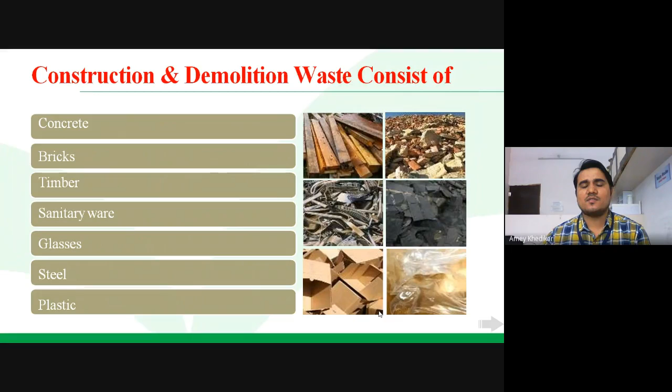The present Indian scenario of construction and demolition waste is 14.5 metric tons out of 48 metric tons of total solid waste generated per annum. We have divided the statistical data into metro cities, a few major cities in India; the highest waste is generated from Delhi, 5,875 metric tons per day. Then Greater Mumbai, followed by Chennai, Hyderabad, Bangalore, Ahmedabad, Kanpur, Jaipur, Agra, and Indore.

This database is as per the 2012 records, and I have got it from a few internet sources. This is the statistical data where we can see the generation of waste from the top 10 cities in India.

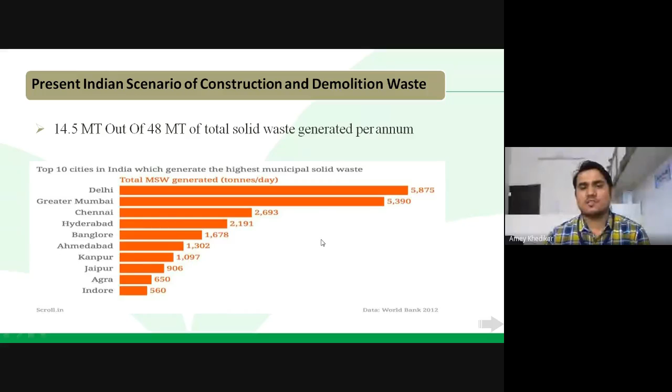Out of the entire waste, 65% is coming from concrete only. Then bricks and tiles 25%, wood 5%, metal 2%, others 1%, and plastic 1 to 2%. This pie diagram shows us the amount of waste in the form of materials.

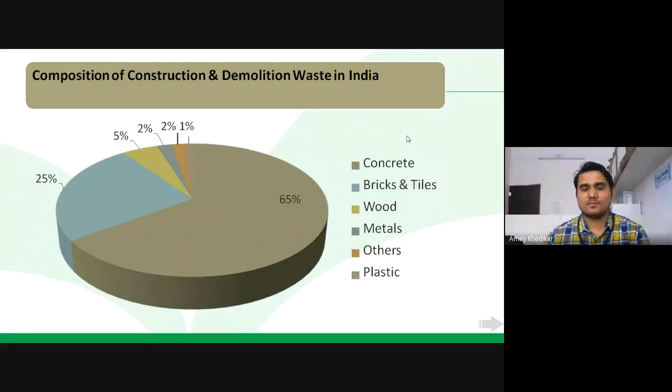Now we'll see the reasons for the increase of construction and demolition waste. Many old buildings, concrete pavements, bridges, and other structures have exceeded their age and limit of use due to structural deterioration beyond repair and need to be demolished. After the average age of the structure, there is deterioration in the structural members, so beyond repair it needs to be demolished.

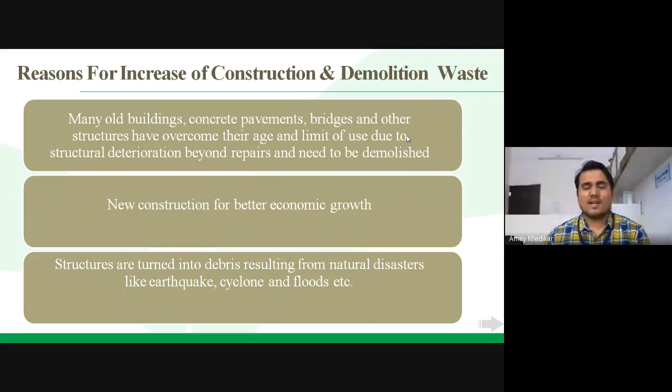New construction for better economic growth. Structures are turned into debris from natural disasters like earthquakes, cyclones, floods, etc. These may be the reasons for increasing construction and demolition waste.

Now we'll see the hierarchy of C&D management: first reduce, then reuse, then recycle, then recovery, and then landfill. In reduce, we lower the amount of waste produced. First we have to reduce the use. Then we go for reuse, using the material repeatedly. Then using the materials to make new products, that is recycling, the best solution nowadays.

I can quote one example: in the construction of the Nagpur Metro, the Chhatrapati Bridge was demolished, and the same material was reused in the construction of the flyover.

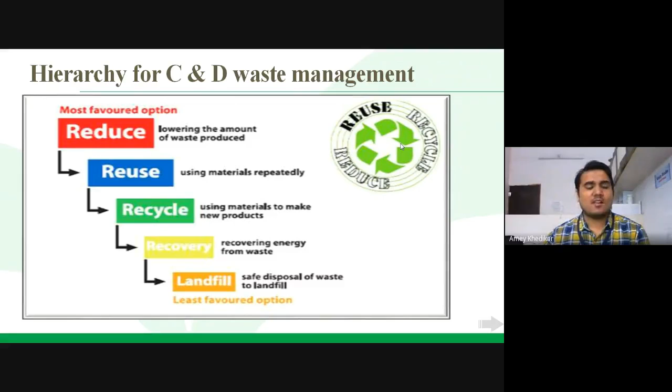That's a good thing. Then the recovery, energy from the waste, and finally the landfills. That is the least favoured option, landfilling.

So we need to sort the process of construction and demolition waste. There are two processes: chemical mineralogical appraisal, and mechanical sorting.

In the chemical mineralogical appraisal, we recognize particular grain size using X-ray fluorescence, to investigate chemical composition in terms of major elements, and X-ray diffractometry to recognize the constitute mineralogical phases. The mechanical sorting process includes bar screening, magnetic separation, and air classifier.

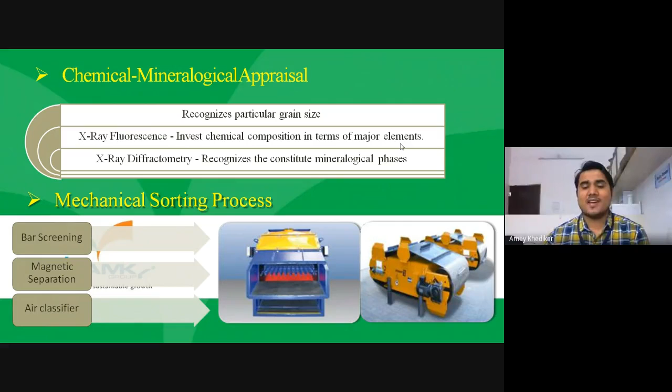Now, the main issues for construction demolition waste management: absence of segregation of waste at source, meaning on site we have to segregate the waste, but due to the absence, it may cause problems. And lack of appropriately located recycling facilities. Then indifferent attitude of citizens towards waste management, that is a major problem. And illegal practices followed by contractors to save money.

So these are the main issues of construction and demolition waste management: absence of segregation at the site, and lack of appropriately located recycling facilities on the builder or contractor side. Then indifferent attitude of citizens towards waste management, that is also a fact. And illegal practices performed by contractors to save money, that is also a fact.

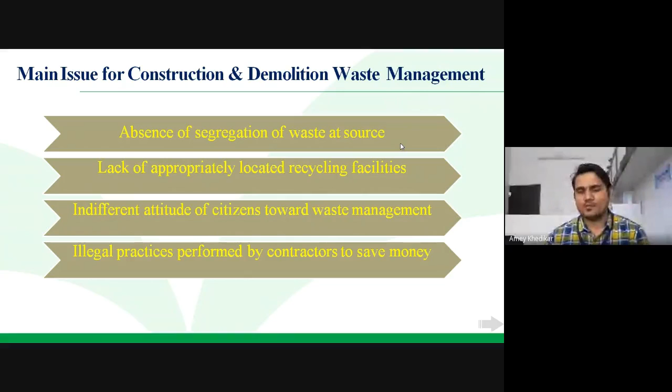Now, key requirements of a waste management plan. What are the points, what is the plan needed in order to have proper waste management? First of all, types, quantities, and quality of waste need to be measured for reducing waste generation.

Then on-site waste sorting, on-site and off-site reuse, areas for waste storage, quantities of waste requiring off-site disposal, and monitoring and auditing programs regularly and periodically, so that we can manage the entire waste.

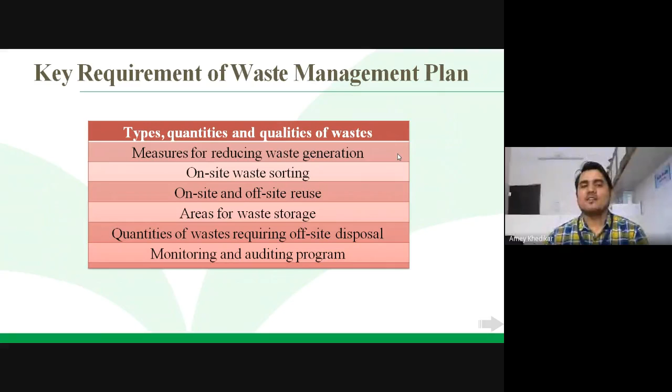Now, C&D waste generation in India is a gross underestimation. As far as the Union Ministry of Forest and Environment has confessed, there is no systematic database on C&D waste. As per estimates of the Center for Science and Environment, CSE, since 2005, India has newly constructed 5.75 billion square meters of additional floor space, with almost 1 billion square meters in 2013 itself.

According to the Technology Information Forecasting and Assessment Council, new construction generates 40 to 60 kg of C&D waste per square meter. Taking an average of 50 kg per square meter, India must have generated 50 million tons of C&D waste in 2013.

Over the last 8 years, it would have produced 287 metric tons of this waste. Now imagine the quantum of waste that we have produced in the last 7 to 8 years after 2013.

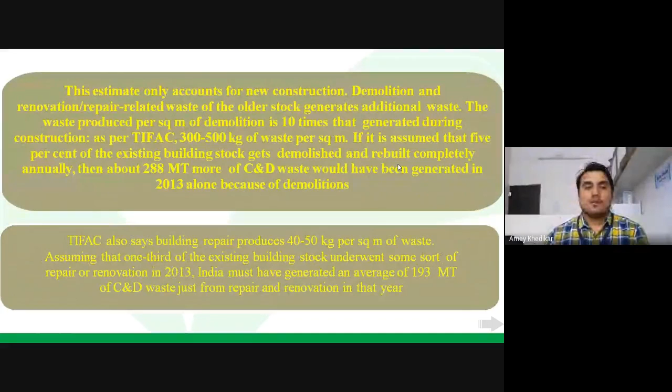This estimate only accounts for new construction; demolition and renovation repairs related waste of the existing stock generates additional waste. The waste produced per square meter of demolition is 10 times that generated during construction. It's a very serious issue that the waste coming out is 10 times more, not 10%, 10 times more than during construction.

As per TIFAC, 300 to 500 kg of waste per square meter is produced from demolition. If it is assumed that 5% of the existing building stock gets demolished and rebuilt completely annually, then about 288 metric tons more of C&D waste would have been generated in 2013 alone because of demolitions.

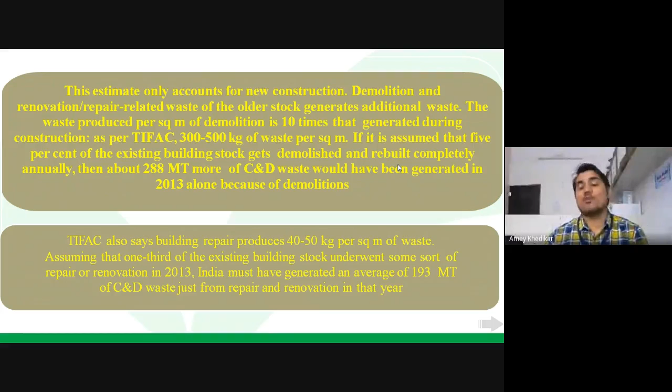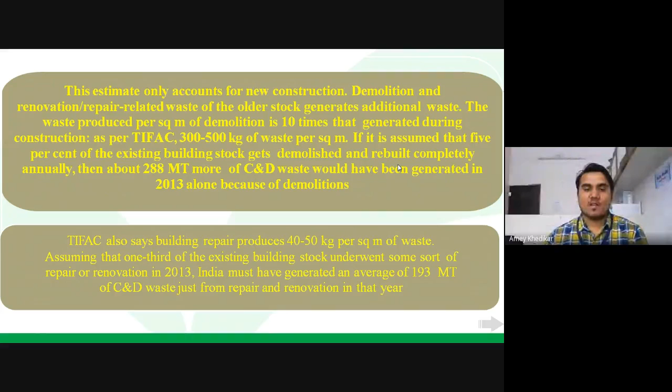Also, TIFAC says building repair produces 40 to 50 kg per square meter of waste. Assuming that one third of the existing building stock underwent some sort of repair or renovation in 2013, India must have generated an average of 193 metric tons of C&D waste just from repair and renovation that year.

Thus, the total C&D waste generated in India just by buildings in one year, 2013, amounts to a humungous 530 metric tons, 44 times higher than the official estimate.

Imagine the scenario if the waste generated from infrastructure projects such as roads and dams is added. Not surprisingly, in India, if C&D waste is quantified, it will be more than all the other types of solid waste put together. Now, the question is, where is all this C&D waste going?

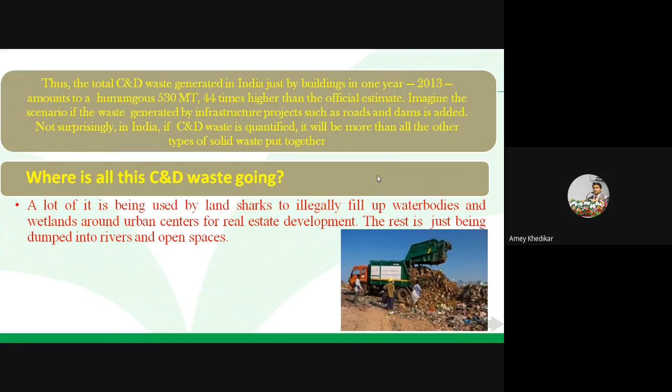A lot of it is being used by land sharks to illegally fill up water bodies and wetlands around urban centers for real estate development. The rest is just being dumped into rivers and open spaces. Basically, it's an alarming situation as far as environmental issues are concerned, since very few things are reused, but most of it is dumped into rivers and open spaces, which is a very harmful case.

There is basically no reuse in India. Construction agencies like CPWD say that Indian laws permit the use of only naturally sourced building material. The IS 383-1970 Indian standard specification related to aggregates for concrete, laid down by the Bureau of Indian Standards (BIS), stipulates that concrete can be made only with naturally sourced materials. Construction agencies cite this rule to avoid using recycled C&D waste.

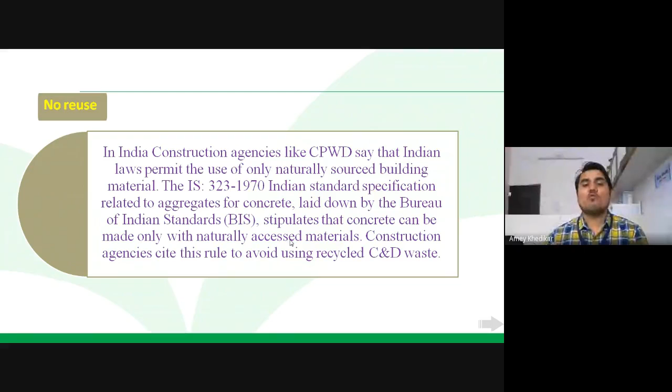Now, building material crisis and environmental concern. I am talking regarding the environmental concern that much waste is dumped only in open spaces and rivers. Indiscriminate mining of sand and other minor minerals has caused extensive damage to the environment, scarred rivers, made many areas susceptible to floods, and destroyed crucial recharge zones.

In 2012, the Supreme Court asked state governments to amend rules to regulate mining of minor minerals and ensure environmental management. On August 5, 2013, the National Green Tribunal declared sand mining without environmental clearance illegal. However, the concern for a deteriorating environment is being seen in the context of growing shortage of this material.

The Union Ministry of Housing and Urban Poverty Alleviation had told Rajya Sabha in 2012 about the shortage of building material, especially for aggregates and concrete. Due to mining bans and restrictions on environmental grounds, the shortage has been so severe that several civil projects in India are facing delays. This is aggravating the housing crisis and affects the construction of roads, bridges, canals, etc.

If sand mining and other natural source materials have to be restricted and regulated, other strategies must be put in place to reduce the demand. Basically, the problem is all about the shortage of building material. So reuse can be the solution, recycle can be the solution. In that context, the government is also asking for explanations from state governments regarding the environmental issues and building material cases.

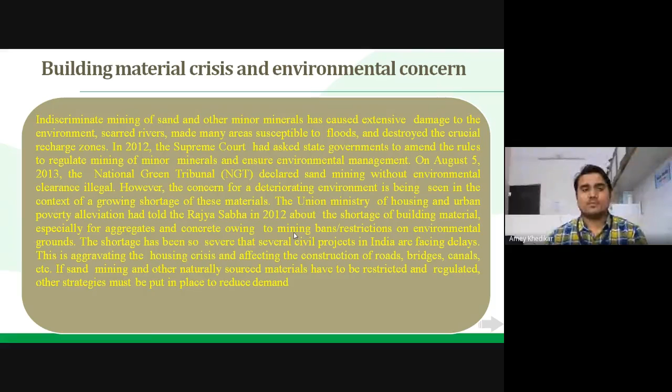...developed a pilot project to demonstrate the potential benefits of increasing recycle rates for C&D waste in Delhi. The project itself has been set up on a public-private partnership basis, which has proved successful as it serves the dual purpose of saving landfill space on one hand and developing the market for C&D recycling on the other. These pavement blocks were made as part of this pilot project, and it is the best example of recycled waste.

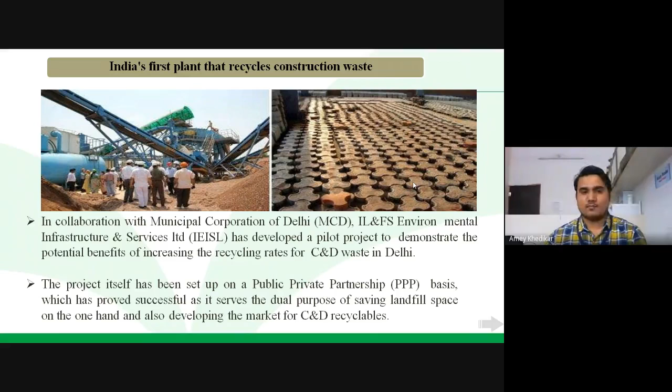Global practices show the way regarding recycling. In the United Kingdom, the Northern Ireland Environment Agency has published the quality protocol for the production of aggregates from inert waste in 2004. This has helped promote use of recycled and secondary aggregates. Almost 280 metric tons of aggregates are used every year, which is 28% of total C&D waste generated.

Singapore, yet another land-constrained country, recycles 98% of its C&D waste. So we can take this as the best example. Singapore is setting the example regarding C&D waste, using 98% recycled material.

In the US, New York has stringent measures for C&D waste as it is landlocked and has limited space for disposal. Its disposal practices are more efficient than the rest of the US. It forces developers to segregate waste on site and dismantle rather than demolish, in addition to other measures. So among these countries, Singapore sets the best example, the US also sets an example, and the UK also sets an example regarding reuse and segregation of waste on site. It is very encouraging to see that Singapore, a land-constrained country, recycles 98% of C&D waste.

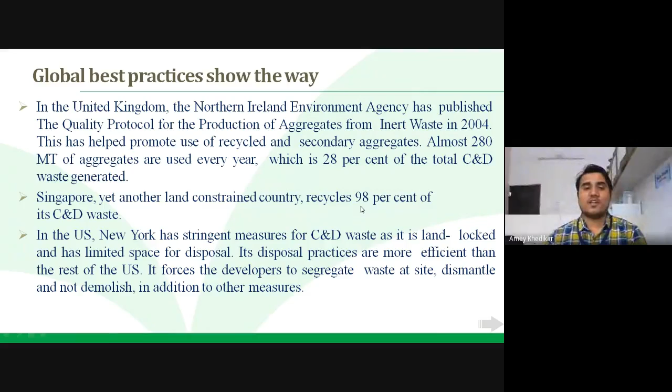Construction and demolition waste - what exactly does it mean? We have seen a lot of statistical data till now - countries, cities, the waste, types of waste, government rules, bylaws, and government thought process regarding this. Now we'll see actually the demolition waste. Basically, it's waste building material, dredging materials produced in the process of construction, remodeling, repair, or demolition of residential buildings, commercial buildings, other structures, and pavements.

More than 50% of waste generated worldwide falls in the C&D category. Many European countries achieve 90% plus recycling, while other developed countries are struggling to improve. Approximately 95% of the waste on a typical construction site can be recycled. C&D waste should not be disposed of in MSW landfills.

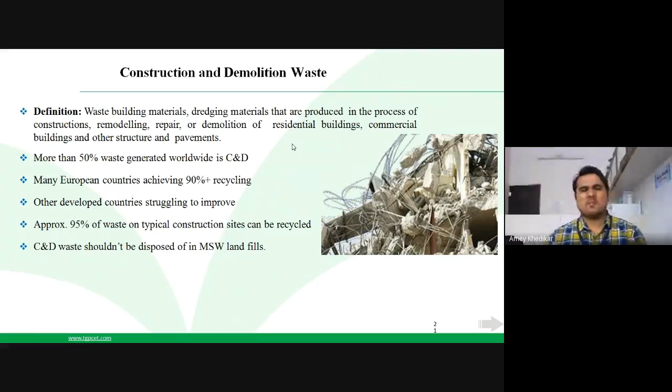So basically it is the waste which is coming out during the construction, remodeling or repairs, demolition of residential, any kind of building, maybe flyover, maybe buildings, maybe road, anything. That is the construction waste.

Now we'll see the contribution of construction industry in India's GDP. You can see here millions of dollars saved if the 3R techniques are applied. 40 to 60% investment is in materials, basically, of the entire industry, and this industry is 100 billion dollars. Out of the 100 billion industry, the 40 to 60% investment is in the materials. Now imagine if we start using the recycled one, then how much we can save.

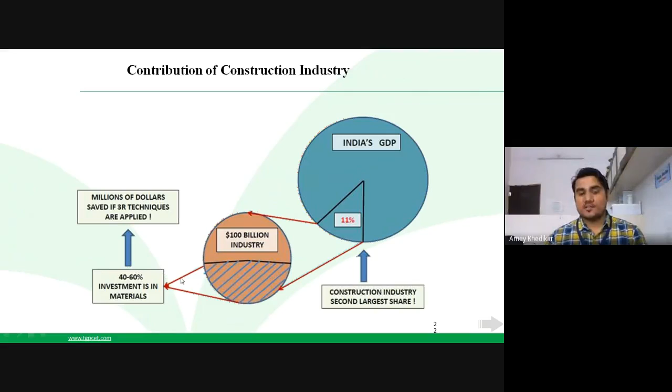Just imagine, in the entire India's GDP, the 11% contribution is coming from the 100 billion construction industry. And out of that, 40 to 60% is coming only from the materials. In the entire globe, the construction industry has the second largest share in the development of the nation, as far as GDP of India is concerned. So we can think here that if we start reusing the materials, then we can ultimately help grow our GDP much better.

Now, categorization of C&D waste: inert material and non-inert material. It has been categorized into two parts. First will be the inert material, and second will be the non-inert material. In the inert material: rocks, concrete, brick, stone, and earth. In the non-inert material: plastic, packaging waste, paints. These are the non-inert materials.

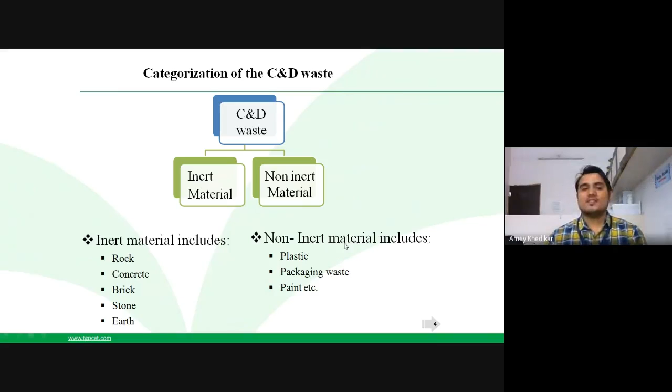Pay attention. I can see the question in the chat box asked by Neha, that construction waste is specified to only buildings. No, basically not. Basically, construction waste may come from any site. If you are constructing a hotel, residential building, commercial, even a tower, a bridge, a flyover, or rehabilitation or demolition, that can be considered as waste.

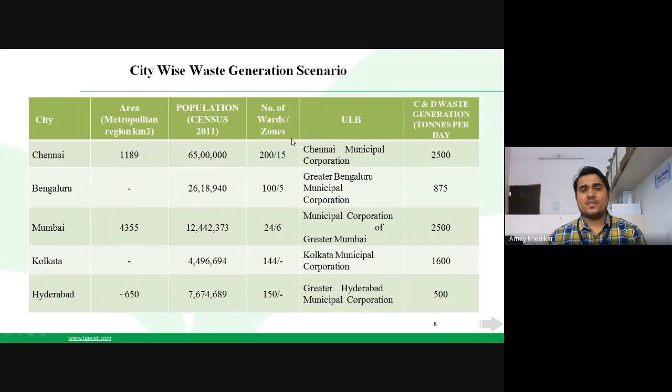So again, we will see in detail the city-wise waste generation scenario. City-wise: Chennai, then population, then wards, the ULB. You can see here Chennai, Bengaluru, Mumbai, Kolkata, Hyderabad. So 2,500 tons per day they are producing. Then Bengaluru 875, then Mumbai 2,500, Kolkata 1,600, Hyderabad 500. So you can see the population, and in respect to the population, see the number of wards and zones. So all these are the statistics.

So it should not be there. Some part the contractor side is faulty, some part negligence can be shown from the citizens, some part if in terms of blaming, you can blame even a few authorities of government also. It's a two-way communication from the society and from the industries. There has to be some mutual understanding, there has to be some strict bylaws in order to avoid such kind of fate.

Okay. Now, in the end, we will see sustainable practices. Plan a separate line of collection and transportation of C&D waste. Separate storage of C&D waste for different categories of generators: household, institution, and infrastructure. Absolutely, there has to be a separate category of generators. Separate things to be collected from household, a separate mechanism is to be there to collect from institutional buildings and from infrastructure. Processing for better utilization, even fine materials can be used as inert daily cover at sanitary landfills.

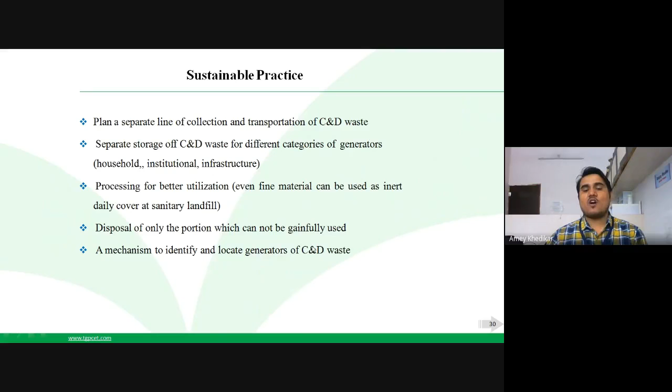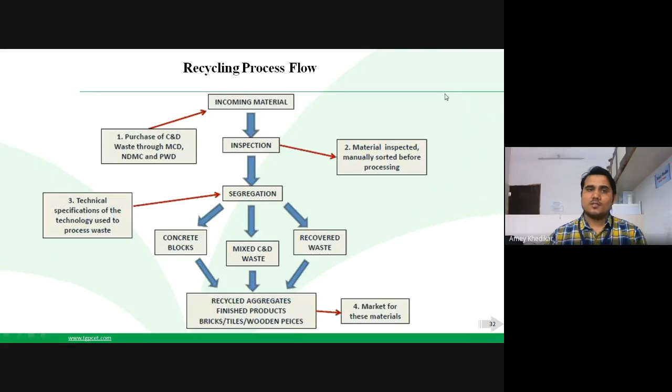Okay. So this is the entire recycling process, where the incoming material is purchased from C&D waste through MCD, PWD. Okay, and as inspection, the material is inspected manually before the processing. Yeah, segregation and technical specification are to be done in terms of concrete blocks, mixed C&D waste, and recovered waste. Then after recycling the aggregate, the final finished product will come, which will be ready for the market. So this is the recycling process flow.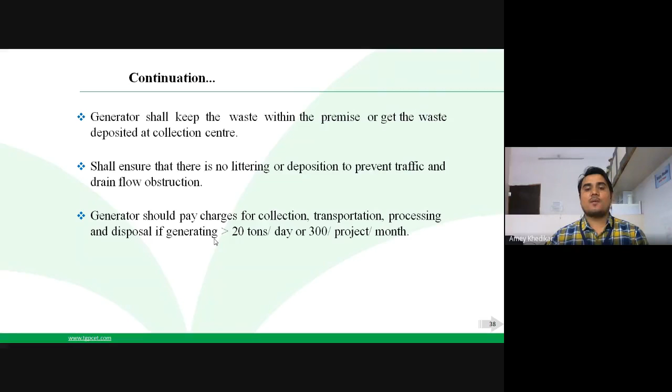Now, duties of a service provider and their contractors. It means authorities who provide services like water, sewerage, electricity, telephone, roads, etc. Authority shall prepare a comprehensive waste management plan covering segregation, storage, collection, reuse, recycling, transportation, and disposal.

Authority shall remove all C&D waste and ensure regular cleaning. In case service providers have no logistic support to carry out the work specified in sub rules 1 and 2, they shall tie up with the authorized agencies. Along with that, there are some duties regarding local authorities.

Issue detailed direction, shall seek detailed plan or undertaking as applicable from generators of C&D waste. Chalk out stages, methodology and equipment material involved in the overall activity and final cleanup after completion. Seek assistance for safe disposal of C&D waste contaminated with industrial hazardous or toxic material or nuclear waste, if any.

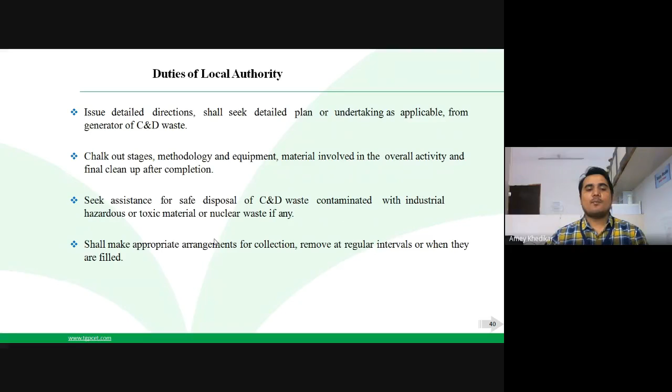Shall make appropriate arrangements for collection and removal at regular intervals or when they are filled. Shall get locally collected waste transported to appropriate sites for processing and proper disposal. Shall give appropriate incentives to generators for salvaging, processing and recycling, preferably in situ.

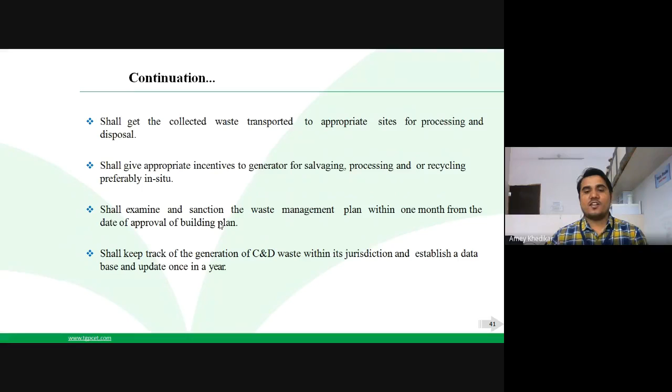Shall examine and sanction the waste management plan within 1 month from the date of approval of the building plan. Shall keep track of generation of C&D waste within its jurisdiction, establishing a database and updating it once in a year.

Shall devise appropriate measures for management of C&D waste and recycled products. Shall create a sustained system of information, education and communication for C&D waste. Shall make provision for giving incentives for use of material made out of C&D waste.

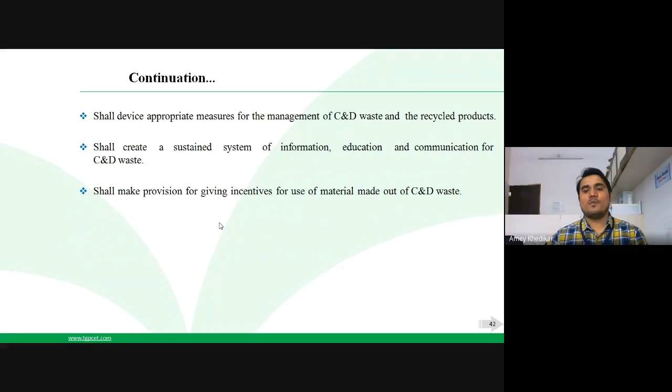Now, along with the rules and regulations of the authority and service provider, there are some criteria for storage, processing and recycling facilities. The site for storage and processing or recycling facilities for C&D waste shall be selected as per the criteria given in schedule number 1. The operator of the facility as specified in sub rule 1 shall apply in form 1 for authorization from the State Pollution Control Board or Pollution Control Committee.

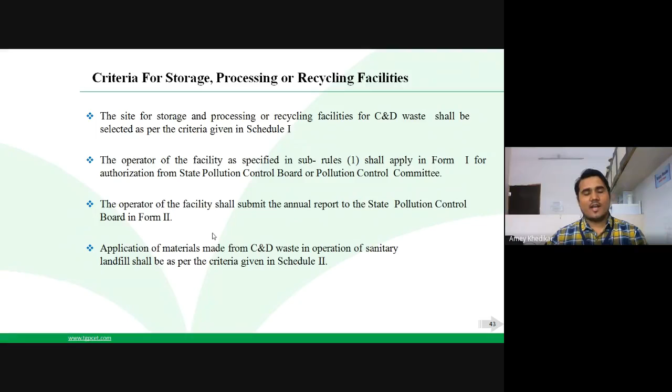The operator of the facility shall submit the annual report to the State Pollution Control Board in form number 2. The application of material made from C&D waste in operation of sanitary landfill shall be as per the given criteria in schedule number 2. Again, then for the state government, there have to be some regulation duties.

So the SPCB or Pollution Control Committee shall monitor the implementation of the rule by the concerned local bodies, send annual report to the Central Pollution Control Board, state government or union territory, provide comments and suggestions with respect to any change required, shall grant authorization to C&D waste processing facilities in form number 3 after examining the application received in form number 1, and shall prepare annual report in form 4 with special emphasis on compliance before 31st July of each financial year.

Followed by duties of state government: the secretary in charge shall prepare a policy document for management of C&D waste in accordance with the provisions of the rules within 1 year. The concerned department dealing with land will provide suitable sites for setting up the storage, processing and recycling facilities.

Students, basically in the MCQ format of GATE, these might be the bylaws which might be asked in the examination. You should pay focus on the year, then the statistical database, the points. Okay. In the continuation, the town and country planning department shall incorporate the site in the approved land use plan to ensure zero disturbance on a long-term basis. Procurement of material made from C&D waste shall be made mandatory, say 10 to 20%.

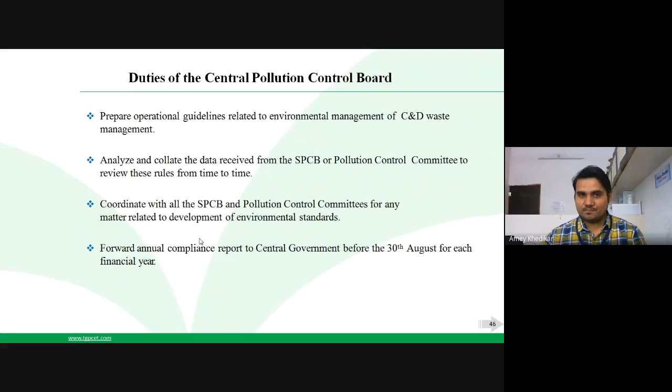Then after the central government and state, there are some duties of the CPCB, Central Pollution Control Board. Preparing the operational guidelines related to environment management of C&D waste, analyze and collate the data received from SPCB or pollution control committee to review these rules from time to time as per the demand of time. It has to be changed. Coordinate with all the SPCB and pollution control committees on any matter related to development of environmental standards. Forward the annual compliance report to the central government before 30th August of each financial year. And the central government, we are asking that report before 31st of July of each financial year.

Then again, duties of the Bureau of Indian Standards and Indian Road Congress. The Bureau of Indian Standards is responsible for preparing the code of practice and standards for use of recycled material in construction activities. The role of the Indian Road Congress shall be specific to the standards and practices pertaining to construction of roads. And duties of the central government: the Ministry of Urban Development, Ministry of Rural Development, and Ministry of Panchayat Raj shall be responsible for facilitating local bodies in compliance. The Ministry of Environment, Forest and Climate Change shall be responsible for reviewing implementation of these rules.

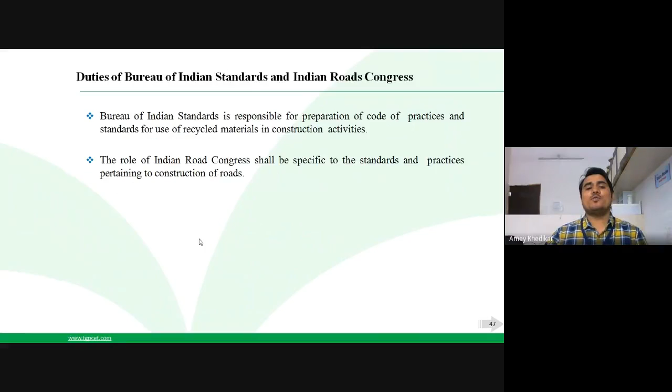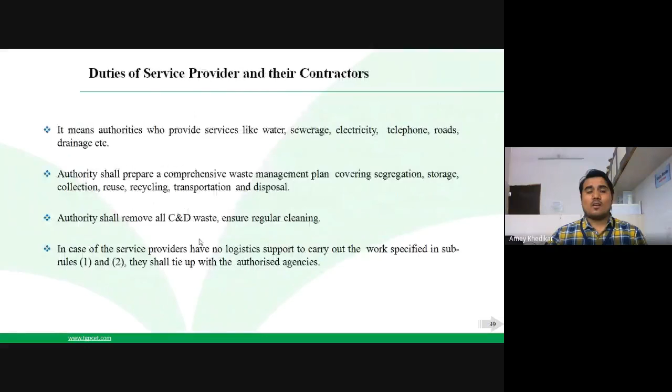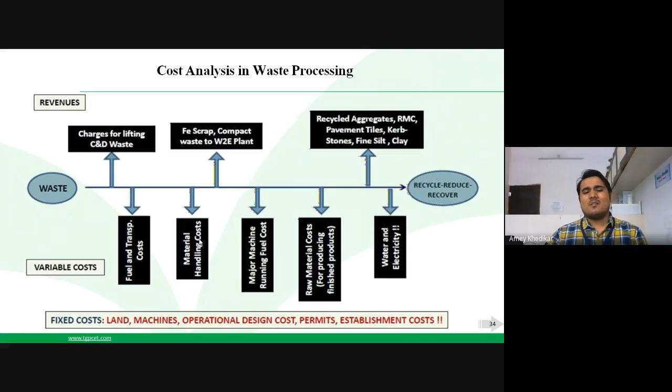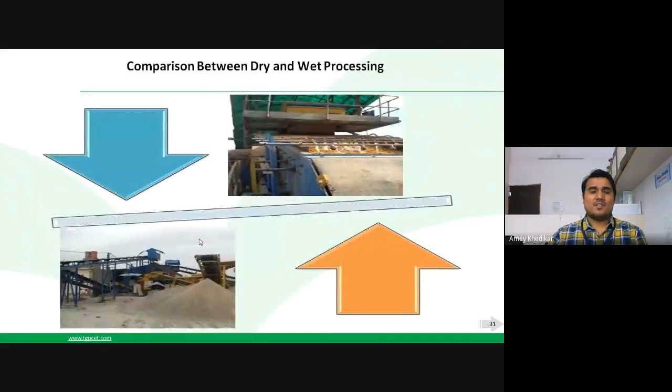So in this lecture on waste management on the site, we have gone through the entire detailed statistical data, central government duties, then Bureau of Indian Standards duties, Central Pollution Control Board, duty of the state government. Then recycling facilities, local authorities. Then we have seen the waste generator duties, rates. What are the rates of the reused material? The cost analysis: fuel and material handling charges are too much. Then the final finished outcome of the recycled products of different sizes. We saw the dry and wet process, the sustainable practices.

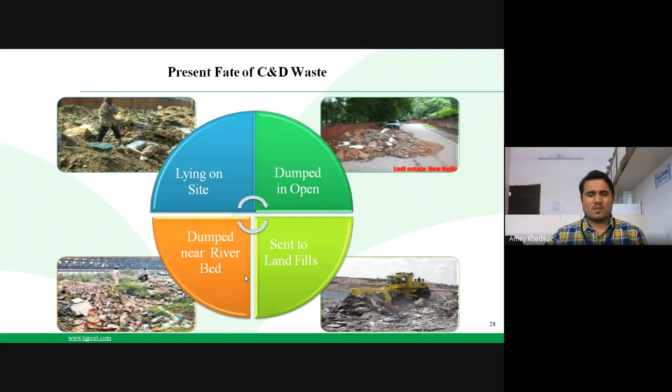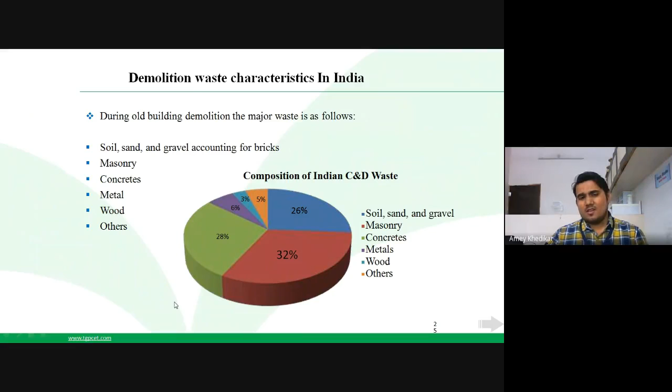Okay, then the hierarchy of C&D handling. Then waste lying dumped on the site. Society is also responsible, the contractor is also responsible; in order to save some money, they follow false practices, illegal practices. Everybody is involved. Location-wise, these are the statistics, a pie chart diagram showing the percentage of waste in the form of materials.

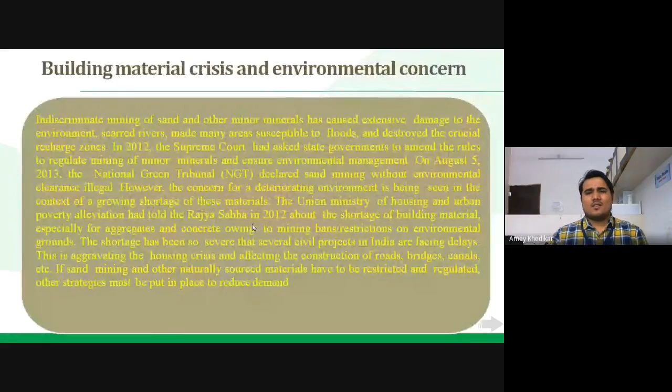So I hope you have understood this. You can revise the lecture again. The link will be available on YouTube very soon. The statistical data will be asked in the examination in MCQ form. So it is very easy to recall the things in this particular topic.